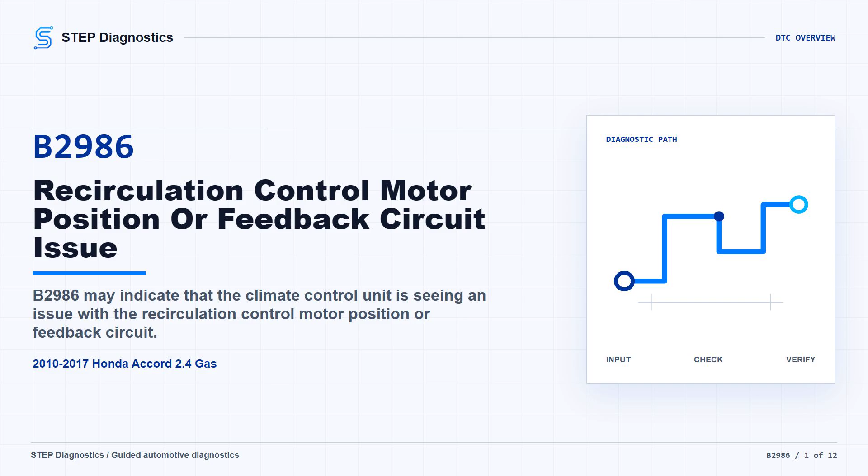Start by clearing the code with the HDS. Cycle the ignition OFF and back on, or use the engine start/stop button to go from OFF mode back to ON mode. Then run the self-diagnostic with the HDS or the climate control unit and check codes again. If B2986 or 55 comes right back, continue into circuit testing. If it does not return, treat it as an intermittent fault and check for loose wires or poor connections in the recirculation control motor circuit.

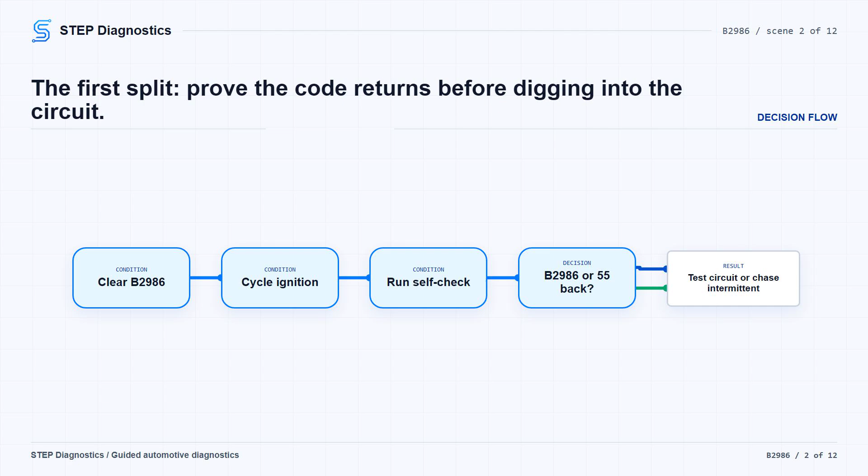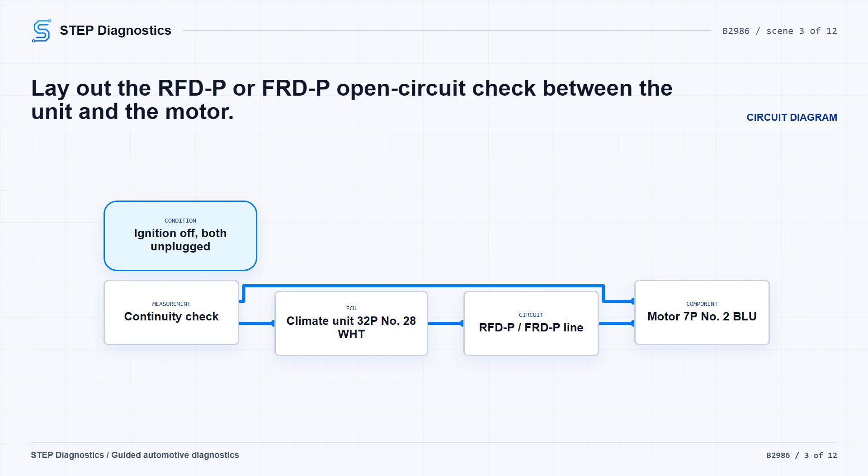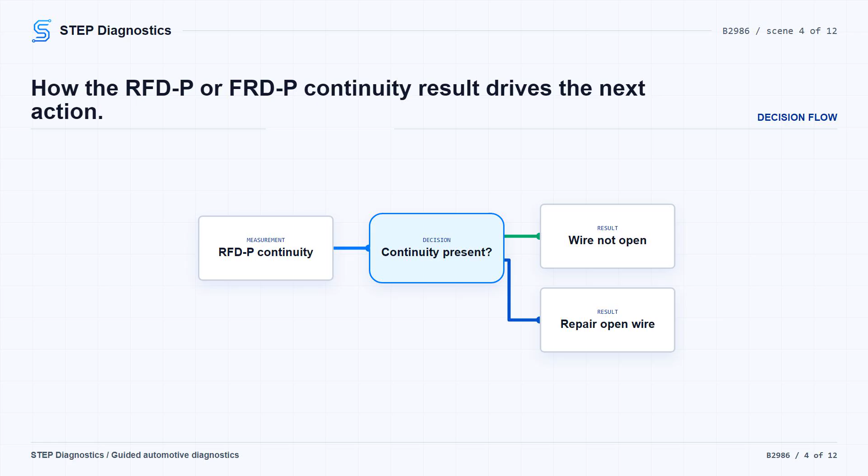With the fault confirmed, turn the ignition OFF. Disconnect the climate control unit 32P connector and the recirculation control motor 7P connector. Now check continuity on the RFD-P or FRD-P line between climate control unit 32P connector No. 28, the WHT wire, and recirculation control motor 7P connector No. 2, the BLU wire. If you have continuity, that wire is not open and you move on. If you do not have continuity, repair the open between the climate control unit and the recirculation control motor.

Next, with the same connectors still disconnected and the ignition still OFF, check the sensor COM or SENS-COM line. Measure continuity between climate control unit 32P connector No. 22, the BLU wire, and recirculation control motor 7P connector No. 1, the RED wire. If continuity is present, that line is not open and you continue. If continuity is missing, repair the open between the climate control unit and the recirculation control motor.

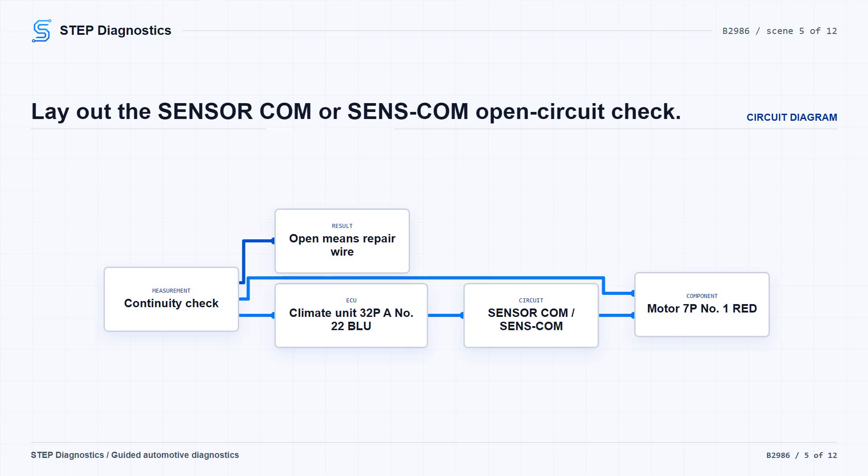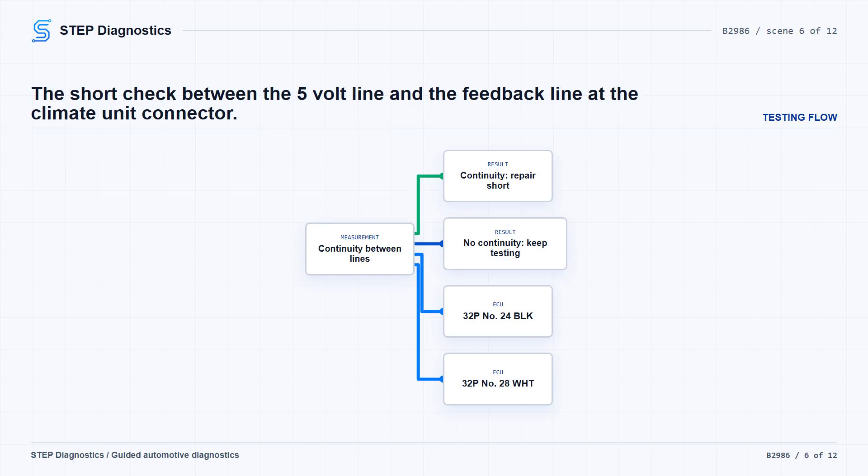Now check whether the S5V line is shorted to the RFD-P or FRD-P line. Keep the ignition OFF with the climate control unit 32P connector and the recirculation control motor 7P connector disconnected. Check continuity between climate control unit 32P connector No. 24, the BLK wire, and climate control unit 32P connector No. 28, the WHT wire. If there is continuity here, repair the short in the wiring between the climate control unit and the recirculation control motor. If there is no continuity, those wires are not shorted together, so continue to the motor resistance checks.

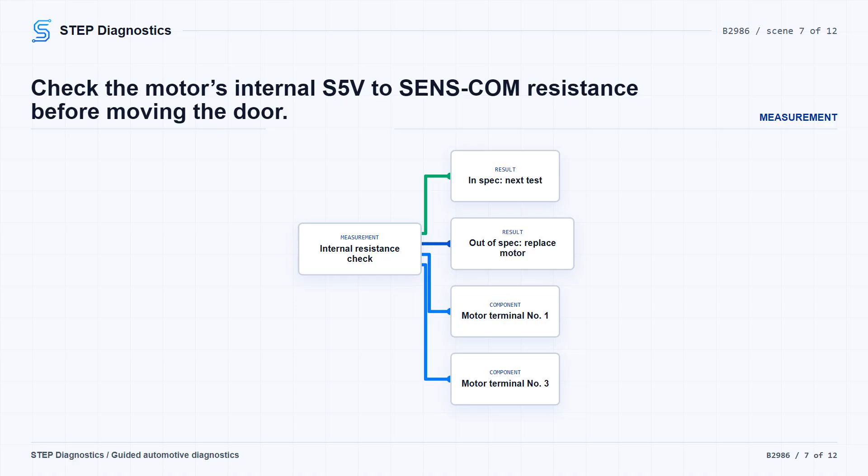With the ignition OFF and both connectors still disconnected, measure the recirculation control motor internal resistance between motor terminal No. 1 and motor terminal No. 3. This is the S5V to SENS-COM check. The expected resistance is 6K ohms plus or minus 1.8K ohms. If it is within that value, go to the next motor movement check. If it is not, replace the recirculation control motor.

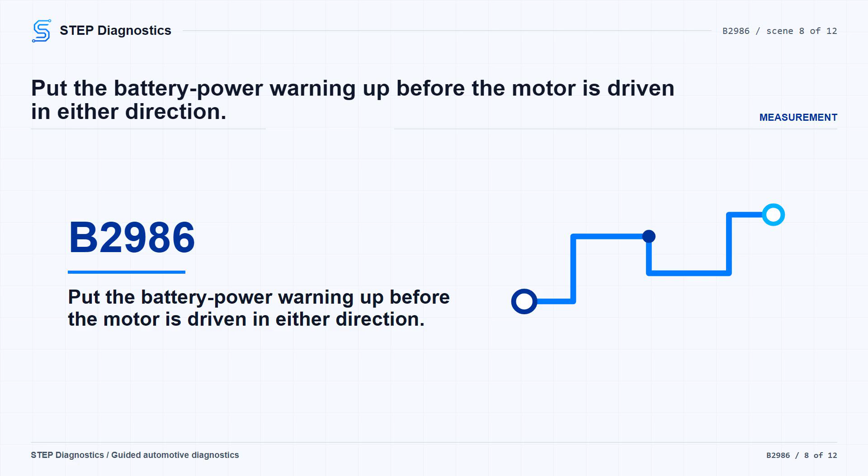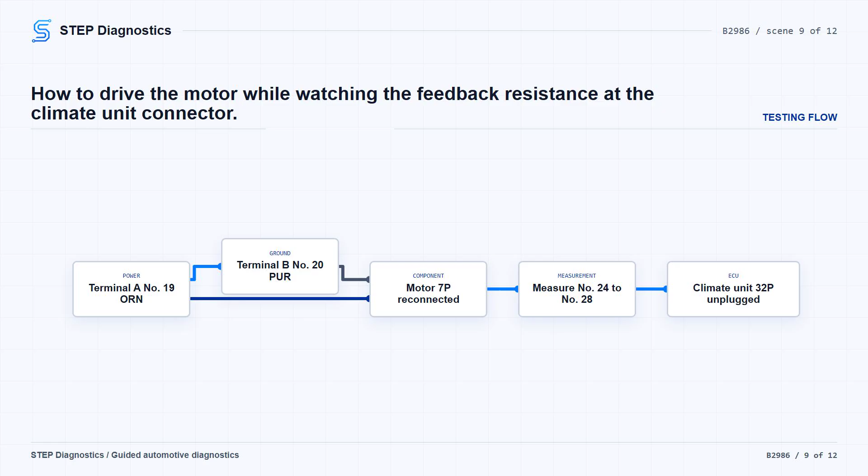For the final test, reconnect the recirculation control motor 7P connector, but leave the climate control unit 32P connector disconnected and the ignition OFF. Apply battery power and ground to the motor control terminals, then reverse the connections to move the motor the other way. Terminal A is climate control unit 32P connector No. 19, the ORN wire. Terminal B is climate control unit 32P connector No. 20, the PUR wire. Be careful here. Applying power and ground incorrectly can damage the motor. When the motor stops running, disconnect battery power immediately.

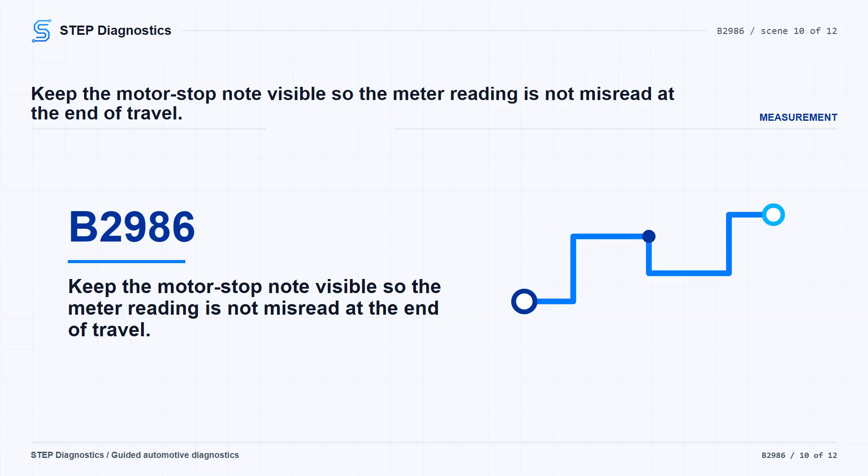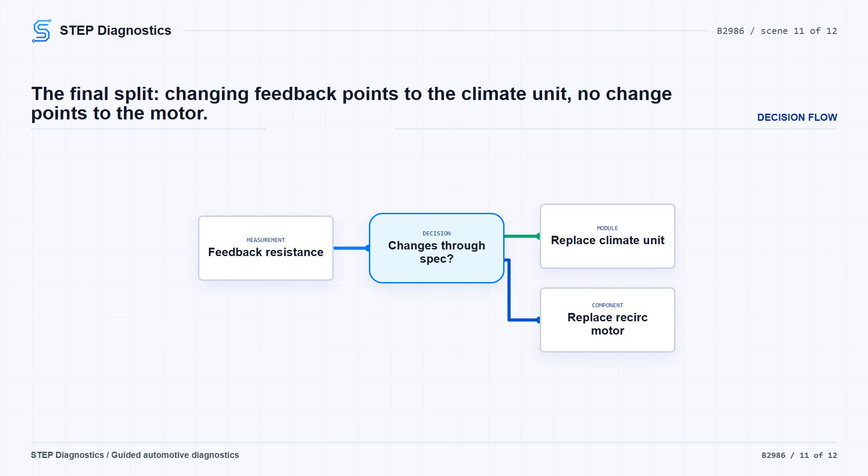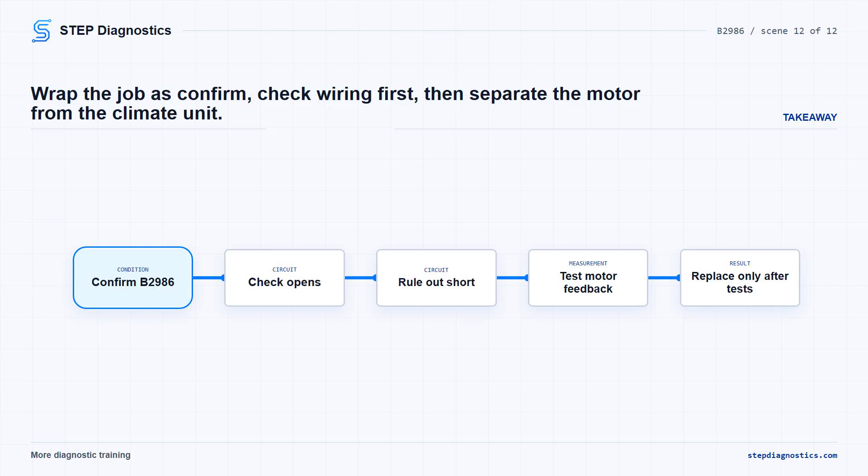The clean way through B2986 is to prove the code first. Check the two open circuit paths. Rule out the short between the 5-volt and feedback circuits. Then use the motor resistance and movement checks to separate a wiring problem, a recirculation control motor problem, and a climate control unit problem. Do not jump to a module or motor until the circuit checks support it.